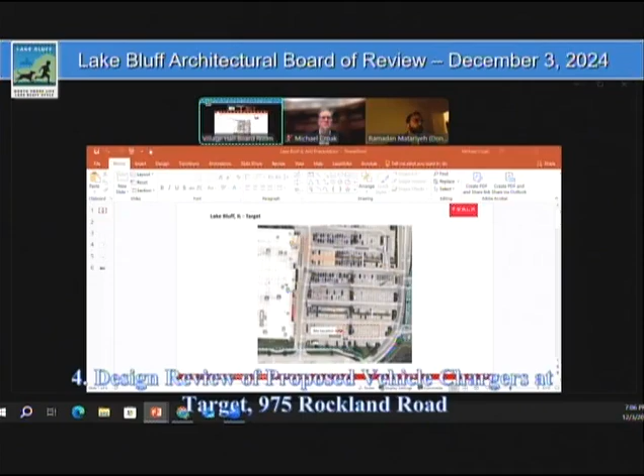Let's see, just... okay, we've got the first slide up.

Perfect. All right, my name is Ramadan Matariyeh, I go by Donnie for short. I'm the design manager for Tesla. I took this project over for Irina Yanishin, she was also another design engineer for Tesla. We are essentially just proposing a new charging station for Tesla here in Lake Bluff in this Target parking lot.

So as we go through this, we're just going to kind of be showing our equipment, what the layout technically should look like, and answer any questions your team may have. We're just essentially trying to look forward to getting through the permitting here with your team.

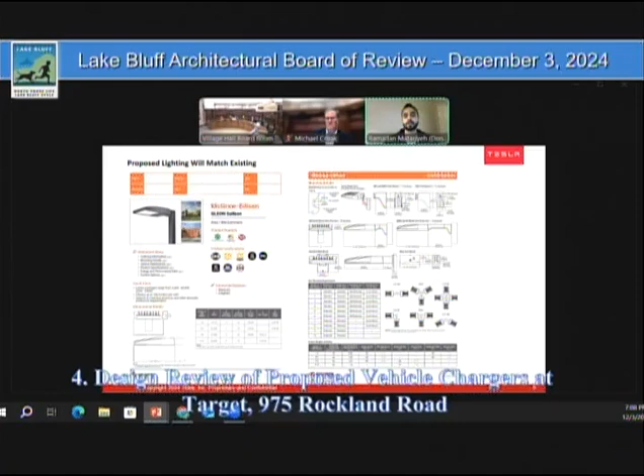The only thing missing here is the extra light that we would be adding. It'd go directly on top of that concrete spline. The only other difference is those are the old V3 posts—our V4 posts are pretty much the same dimensions, they just look a little bit different.

That's about it. Okay. So you know you've got it? What's that, Bob? Does he know you've got this slide up?

Oh yeah, that's the end of his presentation. Yes, that was pretty much my presentation. Essentially, we put this together just to let everybody know what our site plans look like, what the tentative plans are, how the layout will look in the field, the lighting that we're going to try to model and replicate to match the existing Target parking lot, and the location of everything. Just wanted to open it up at this point and see if there was any further questions or anything you needed clarification on. Art, you want to start?

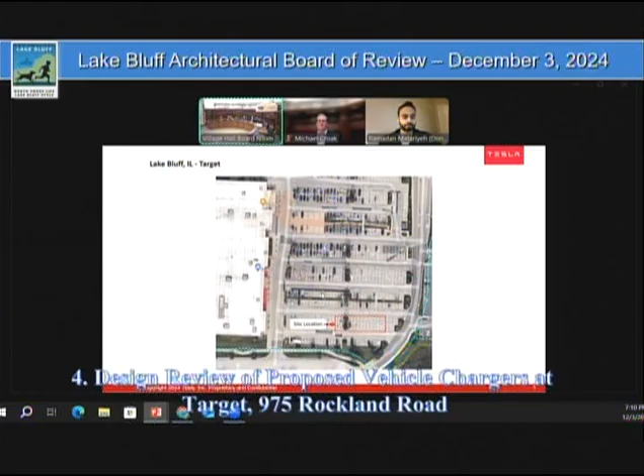No, I don't really have any questions. Essentially, you're not trying to screen your equipment, you are providing screening for the ComEd transformer. So we are providing screening. If you could scroll through the slides one more time, Michael.

Let me go to the packet, maybe that was showing a little better on something that wasn't in the slides but was in the packet. So on page 2 of the PowerPoint presentation, I don't know if everybody has it in front of them. We do have screening for the ComEd transformer using landscaping.

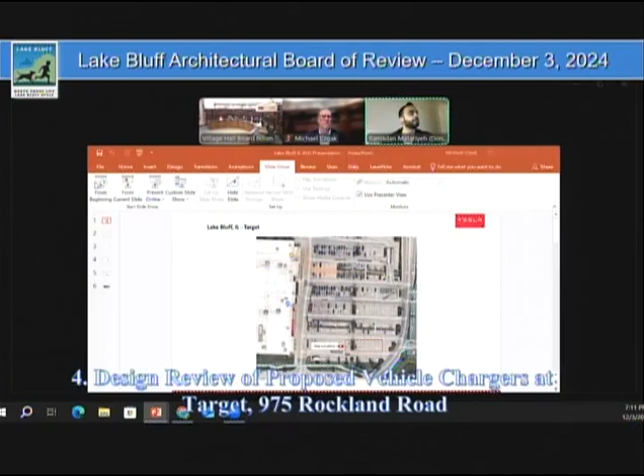We could essentially match whatever your team would propose. A lot of times we just use typical landscape screening just to try to have the least amount of impact there.

And then we do have also screening around the cabinets on the same exact island. It's what we call a Trex enclosure, so it's kind of like a fence with a gate opening. There are 2 entrances, 2 different entrance points. It would be equipped with a Tesla lock. We could give that lock combination to the Target team, but if the fire department or anybody else needs to get access to it, we would be able to provide and work with that team as well.

And I see that it's a saddle brown color. Yes. Picture of the other parking lot, you could see it in the back. The same? Yeah, it looked like something was white in that.

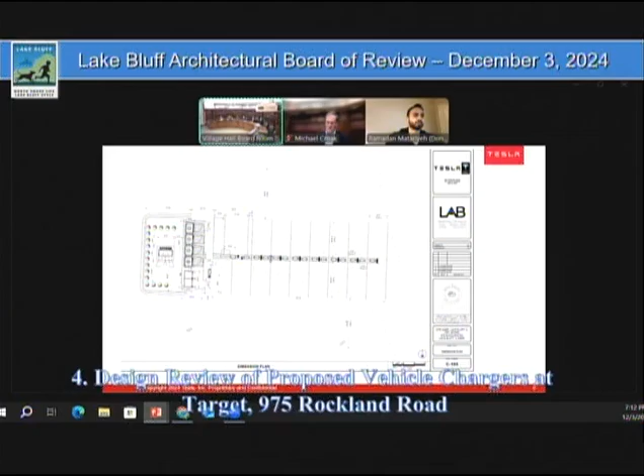We've seen this several times, and it seems to me that most of what we had talked about previously, they've done. So I think it's fine. Same, yep, it's fine. So, did you have anything else? No, I think the location is great and it looks good.

I have 2 questions. One, is the material around the big transformer on the ground - looks like there's landscaping around the perimeter, but then there's something else around the transformer itself. I don't know, is that gravel or rock or what?

Yeah, so obviously the transformer does need to go on a ComEd approved transformer pad for safety, to make sure no critters or anything could burrow underneath it. We would put gravel on that island as well. Typically we use crushed stone, any type of smoother surface, just to prevent safety issues for when ComEd does go out there and install that transformer, plus when our service techs are out there. We want to make sure the type of stone they're walking on isn't going to cause any slips, trips, or falls.

So we would have the same exact type of crushed stone or gravel inside of the Trex enclosure as well. So then it looks like there's a grass band around the perimeter that the evergreens are planted in? Yep, yeah, exactly.

And somewhere in here, you are proposing to replace a tree, and I don't know where that tree is. I think maybe it's in the island up. Proposed replacement of red maple. Give me 1 second, I can pull that up on page L101.

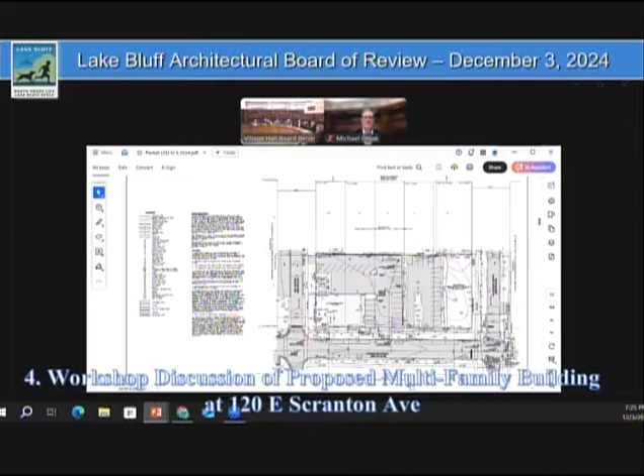The scale of it is large. I think in half of the site we feel like, oh, this is pretty comfortable. And then if you think about Scranton Street and the commercial buildings there, and then you go north, you see commercial buildings and residential buildings. So even from the turn of the century, it was more like, okay, we have a commercial building, next door we have a residential building. And I don't see that, and I know some people have issues with that idea.

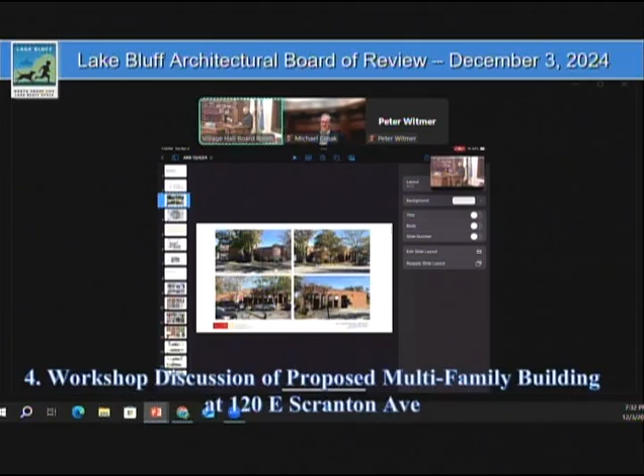So this is just the existing site, this being the CBD. This is just language in the design, which I'm sure y'all can read, which was about really relating to buildings in the CBD that are visually compatible with that.

Can you hit play? Did that get it to? Yeah, probably would. Oh, that's much better. Thanks, Drew.

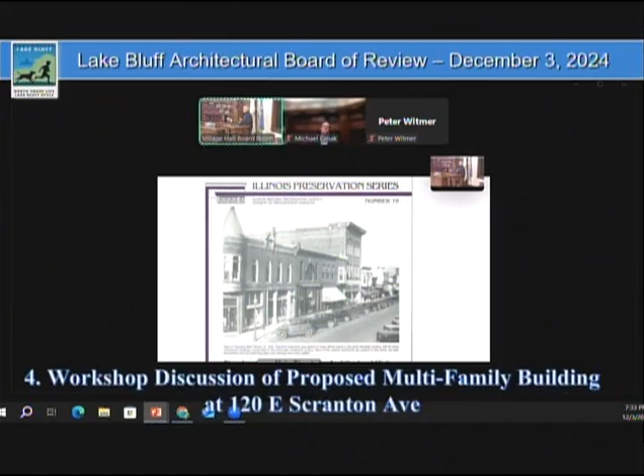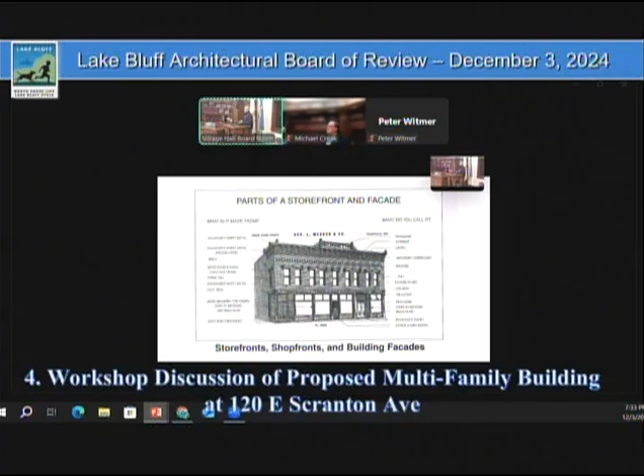And then I just had the pamphlet from number 19 in the Illinois Preservation Series, which talks about, actually it was interesting to see, they were talking about the cast iron and how it translated the storefront a little after the turn of the century and how that developed. But then just the elements of typical CBD small town buildings, double hung windows, cornices, some entablature on the top, and then on the first floor they have retail, so they were trying to have something a little bit bigger.

So we had spent a fair amount of time looking at buildings here. We did a submission for Block 1 prior to what it was, so we had spent some time on that and thought about the CBD at that point. And then when we did about 4 years ago.

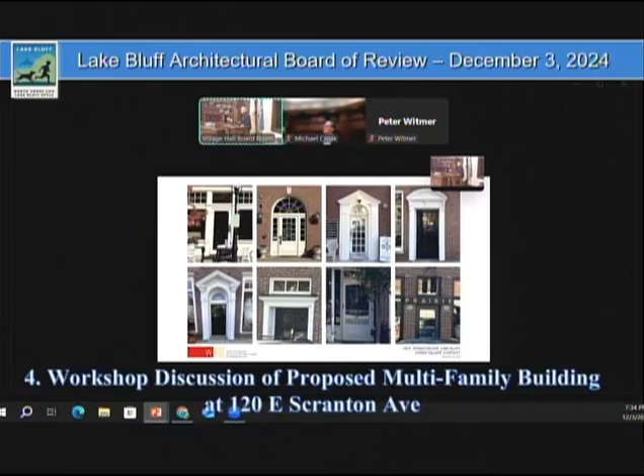But I think just looking around town in terms of the cornice details, existing windows, mainly double hungs, double singles, in different ways that they do them, some arch, some brick detailing. But really the detailing in the buildings is pretty simple. It isn't a really complicated set of parts. I think entrance doors are interesting, all different types, pediments, arches, squares, those things.

So this is the language that we developed for the building itself. Soldier courses around the windows. The single windows have arches over them, limestone or cast stone sills, and then the cast stone detailing of the cornice in the top piece, the pilasters at the corners, the front entrance being a circular entrance piece, and then the metal porch elements at the corners, which we think is this sort of kit of parts of cast iron or metal things that did openings at the lower level, as opposed to some sort of more residential wood trellis kind of thing. We think that the steel, black steel, makes a lot more sense.

All right. Oh, this. Oh, no. No. Oops. Here we go. Okay.

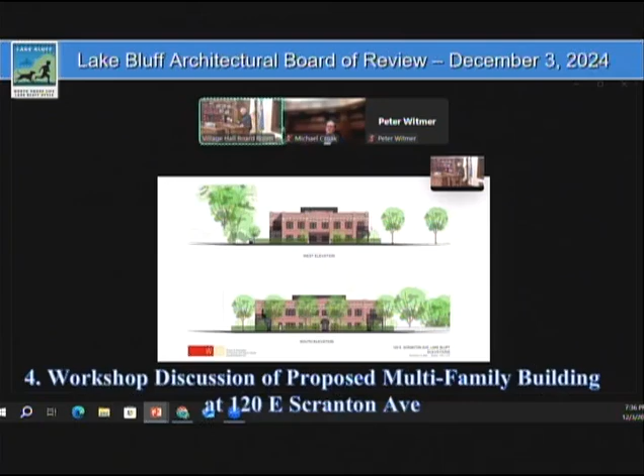So the elevations are really, this is the two street elevations, which is the south elevation, which has a center door. It's symmetrical, has a pediment over the center section, then steps around at the back corners and has porches at the end. And then the west side has the garage entrance in the center, which has a pediment, again, at the corners. We do have the penthouse element, which we're planning on doing in dark siding to make it recede.

It has these corners cut out for the outside areas. Underground parking really was part of the design elements too, which really makes this thing work because we don't have garage doors, we don't get all the cars off the streets. Units range from 2,000 to 3,000 square feet.

This is a 4-unit on the first floor. We may go to 3 units if people want bigger units, so we'd have as few as 6, as many as 8 units. And then the penthouses, which have private areas and have green space on the roof for the second floor units.

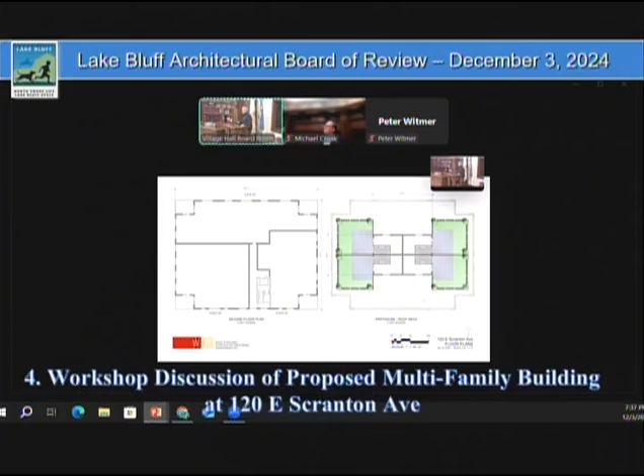And so I really like what they've come up with for that, sort of keeping the parkway trees that are there. We may have to replant them if they end up not being able to be salvaged during the construction.

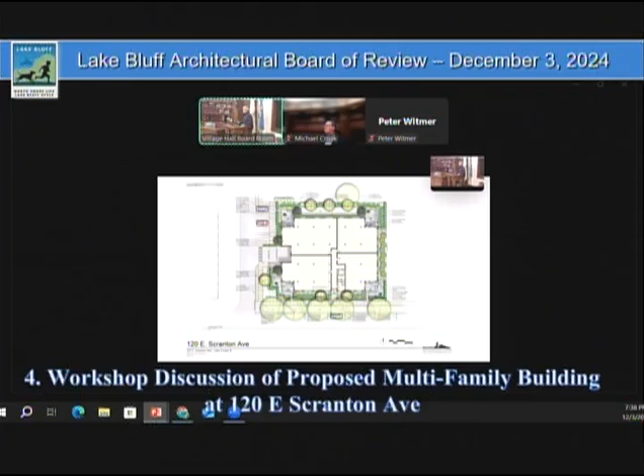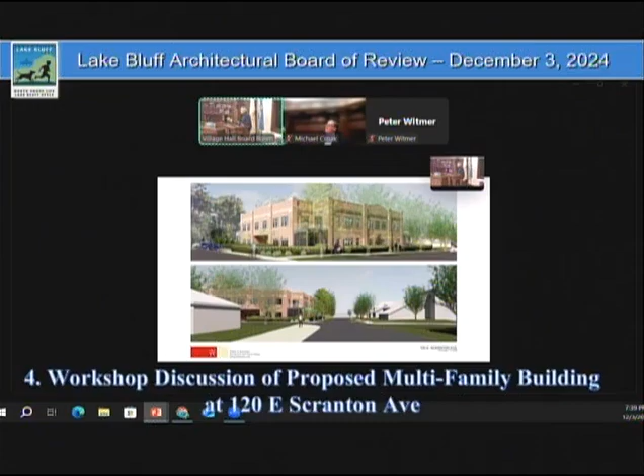And then these are the renderings of it. So the brick, we would like to use a historic brick, much like the ones that we use down on McKinley, with a cast stone, same thing. But I like the hand-molded look to it. It's a little bit oversized, it isn't a true module. Again, it's more of a historic Virginia type brick, and it's a pretty deep red brick. These renderings tend to have it a little bit lighter. I think it'll be a little bit darker, which will fit in the CBD really pretty well.

So I think that's it for my presentation. So I'd open it up to you.

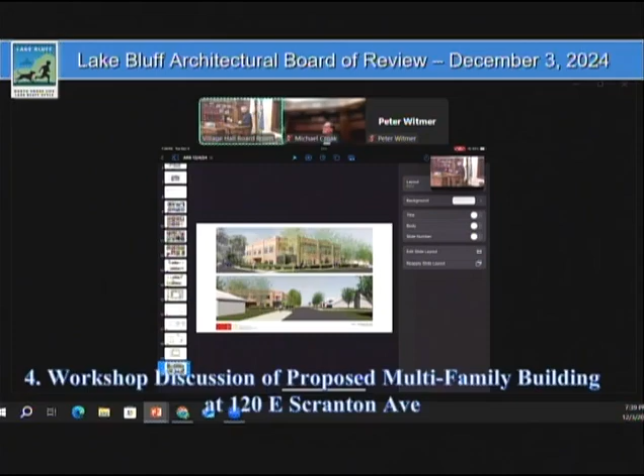You done, Pete? That's it. Okay, Art, comments? You want to start?

I guess I would take issue with making it look like the rest of the buildings in the downtown, and I don't think that's necessary. The other thing is immediately to the west, it's not a two-story building, it's one-story, so it's not really connected to those buildings. It seems to me it could be a different building, maybe a better looking one.

I use the train station as an example. It's completely different than the rest of the downtown buildings, but it's really a positive addition. I wonder if this is an opportunity to do something that doesn't look like the rest of the buildings on the south side of Scranton, but really improves the look of downtown. The other thing is it doesn't really look residential.

That would bother me a bit. For example, did you consider individual entrances for the ground floor? We do - we have entrance doors from the screened-in porches.